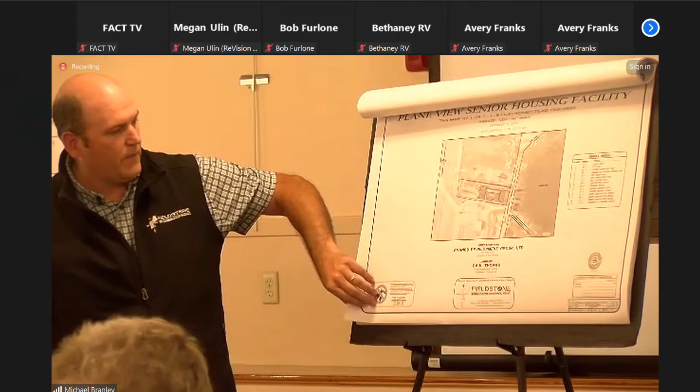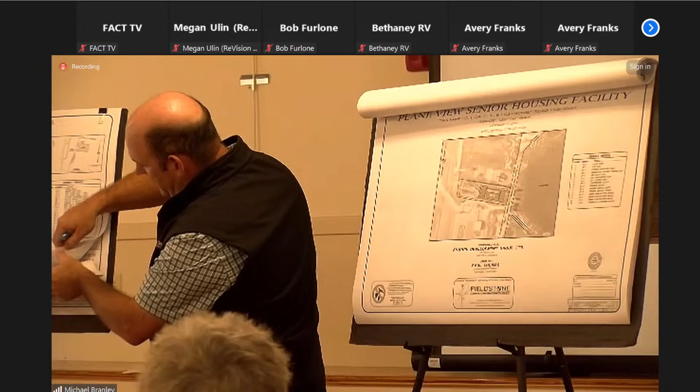With this submission, it's kind of what we had submitted before. I know there was a request for me to bring the old plans and the new plans so that we could go back and forth. With this project, we had modified the parking layout. As a condition of approval, we have to modify the parking layout in the back to accommodate no waiver in the parking lot reduction. So this was the plan that we had presented and was ultimately conditionally approved.

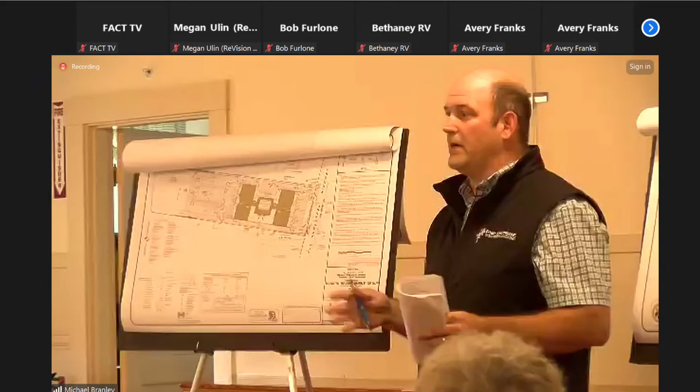This plan, if you recall, showed a future parking area back here, but we didn't finalize or formalize that because the board, unfortunately at the time, denied our waiver of the 20% reduction request. So with this layout, we needed 118 parking spaces. The current layout that we have before you depicts the 118 spaces, and it shows an improvement to the landscaping. We also addressed the drainage and utilities for the project.

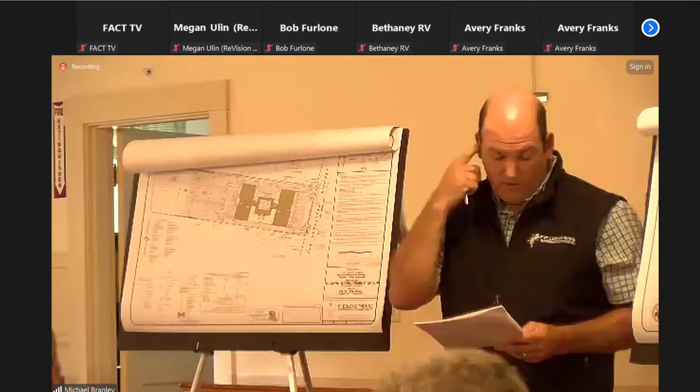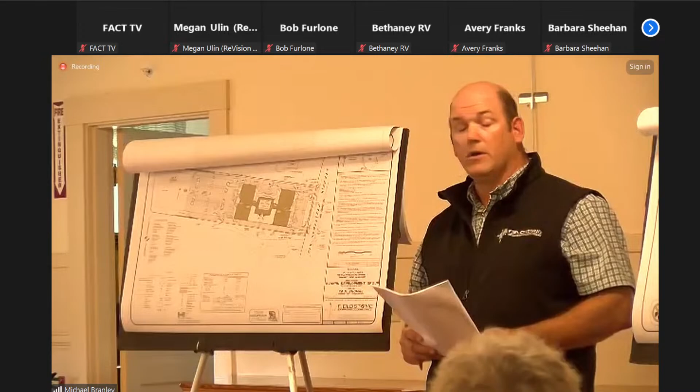We can go into as much detail as the board would like on that, but looking at the staff memo, I want to focus on the questions relative to the drainage plan, utilities plan, and landscaping plan. We took the opportunity this week to make those adjustments, and I brought 11 by 17 color plans with me. I just want to go over the very minor modifications, and I think it'll show that we have sufficiently addressed all the requirements. So, if you don't mind, Mr. Chairman, I'll hand these out to the board, and then I can walk through the changes.

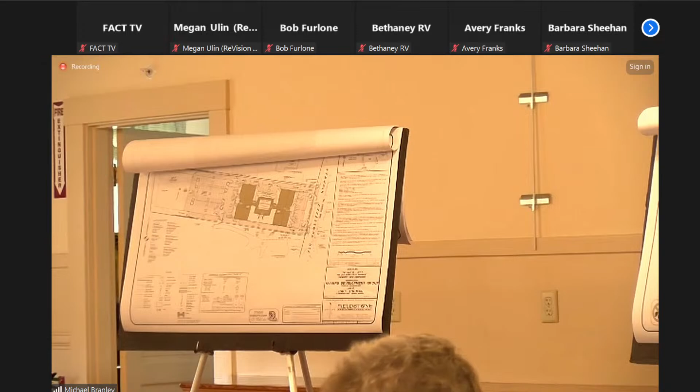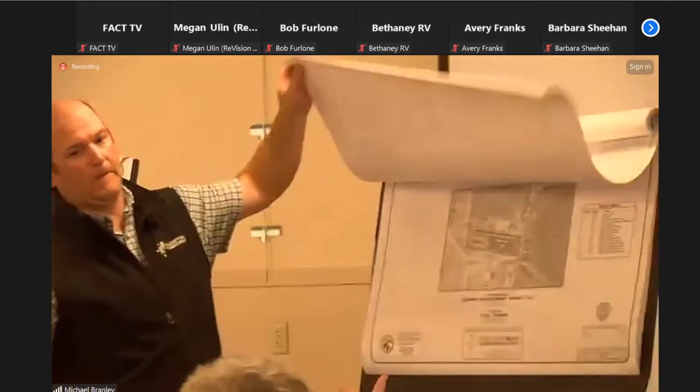There are very few revisions to the plans that are before you, and the ones I have, I'm happy to go over. I think the first place to start is just taking a look at the set, and we'll walk down through those.

The drainage plan had a comment that it was incomplete because we didn't show the ribbon around the building and the connection to the drainage system. So basically, all around the entire building we have a stone drip edge, and that has a 6-inch perforated pipe that ties into the drainage system. We've shown that stone drip edge on this revised plan in front of you.

We've shown 3 connections to the drainage trunk line that was part of the plans we submitted. There'll be a connection out in the front corner of the building tying into catch basin 1, a connection in the middle tying into catch basin 2, and another connection down here. We typically don't show perimeter drains and connections until we get into a construction plan set.

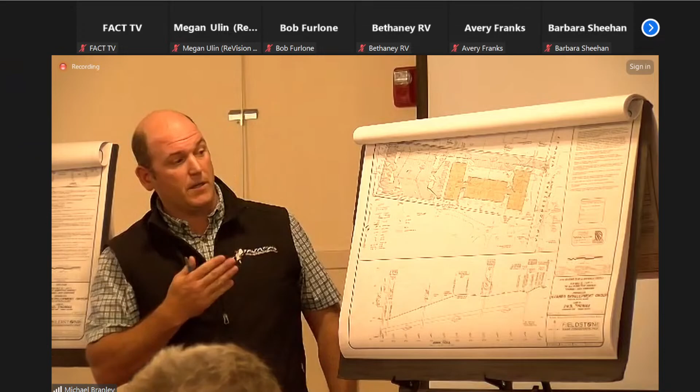But it was a valid question, a good question brought up during the plan review, so we wanted to detail that on these plan sets. We normally don't show that because foundation design can change a little bit when it goes to a structural engineer, and they might recommend an 8-inch pipe instead of 6-inch. But our calculation shows 6-inch would work. That pipe goes around the entire perimeter of the building and ties in at 3 locations. So that really addresses the drainage question on this one.

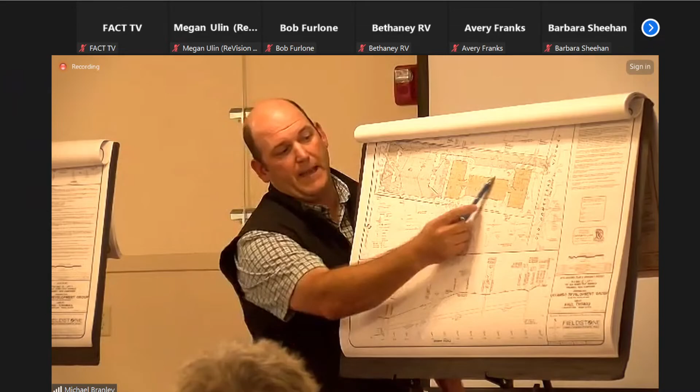The one you submit to the state will show exactly what you have now. The state ultimately approves, and the treatment components on this project are the chamber system in the back, so we're not accounting for this perimeter drain for treatment. That perimeter drain ties into the closed drainage system and ultimately goes to the StormTech chamber system. So that's really what the state will focus on, but the perimeter drain is part of their review. That's the one change for drainage.

As far as the utilities plan, there's a note in the staff memo that says the updated utility plan shall include a manhole as requested at the street intersection. That's this connection right here. That manhole actually is already in.

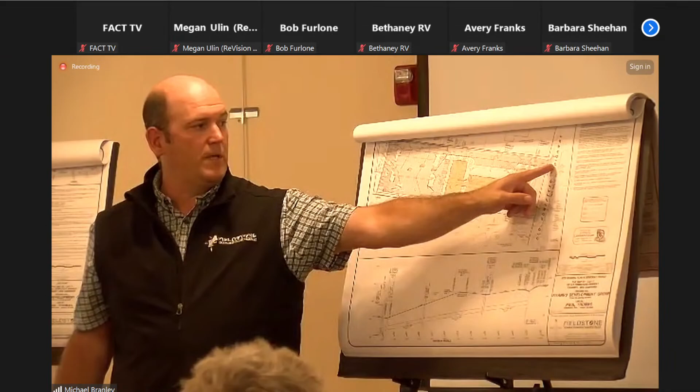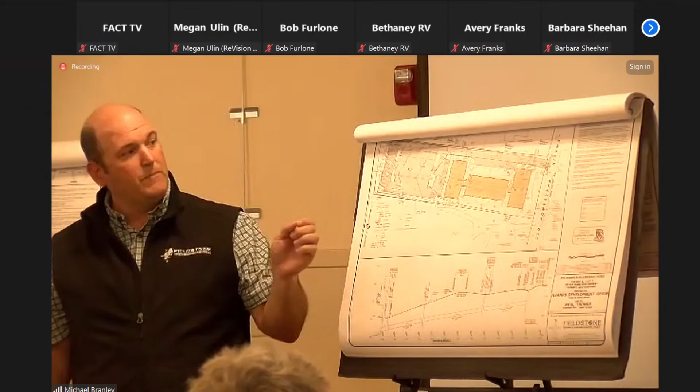When we secured approvals for the landowner, Mr. Thomas, he actually put that manhole in and the stub onto the site because DOT was coming through with paving the highway, and there's a 5-year moratorium when the state does that. So he did that to make sure the utility connection wouldn't be held up by that moratorium. That manhole is there, which is why we weren't showing the proposed manhole, but for whatever reason the symbol for the existing manhole wasn't depicted, so we added that to the plan before you.

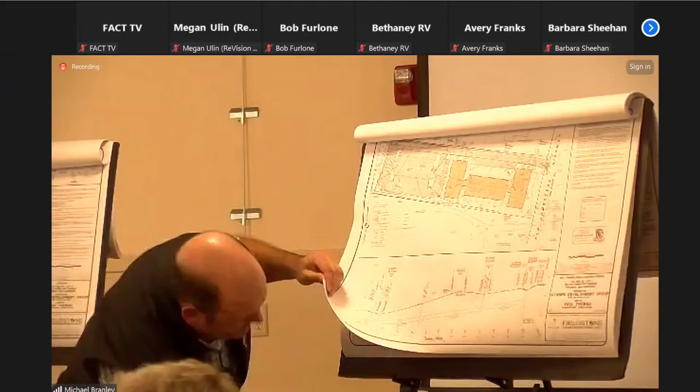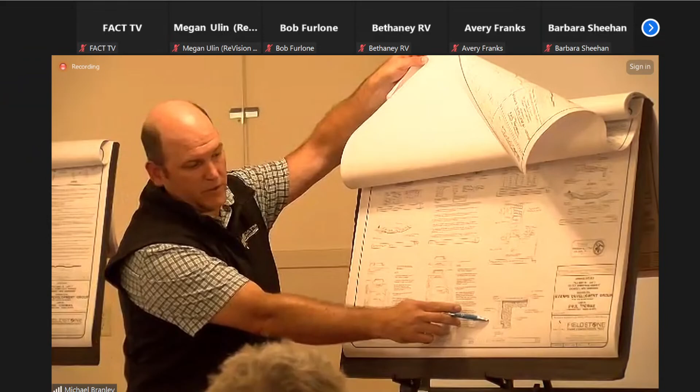So a very minor change on that one. I'll also note that with the addition of the perimeter drain, we added a detail to the detail sheet showing the stone drip edge perimeter drain material, dimensions, and the 6-inch pipe. So it's part of the construction set, not just detailed on a plan view. Sorry to be hopping around — that's why there are 4 plans, one being the detail sheet, the last one.

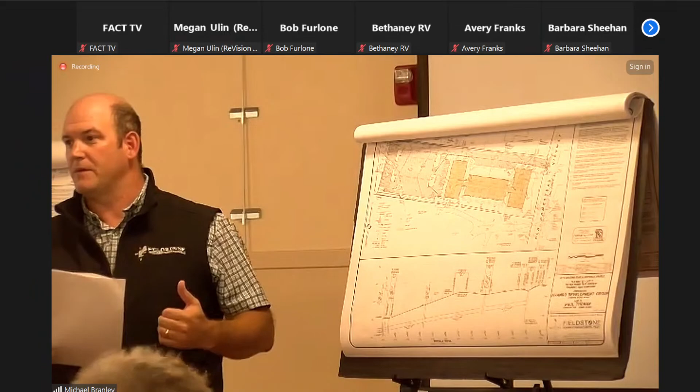The last item consists of the landscaping. I personally did the calculations for the landscaping this week, because this calculation can get very complicated for some reason. I tried to really detail and simplify this, because I think what happens is we're running a lot of calculations and sometimes we group them, making them hard to check. So what I did, and you'll see on the landscaping sheet in front of you, sheet 6, is detail the areas I'm counting in the back of the parking area for landscaping.

So when I ran the numbers, I was short by about 50 square feet. We removed one parking space, which is 152 square feet, just so you know. We've updated the site plan in front of you, which shows an updated parking calculation where 117 spaces are required, and now we have 117 instead of 118.

Taking a look at this plan, this heavy gray line shows the outline of the parking area - the area people occupy with a car pulling into a parking space, where you'd typically square off the parking. When you have these 4 internal spaces, clearly internal, that comes out to about 2,500 square feet. Then we have these corner areas, which are also internal. We've always been able to count those as internal because if we square up the parking lot, it's internal. It's not counted for a buffer, not counted for anything else. It's part of the parking.

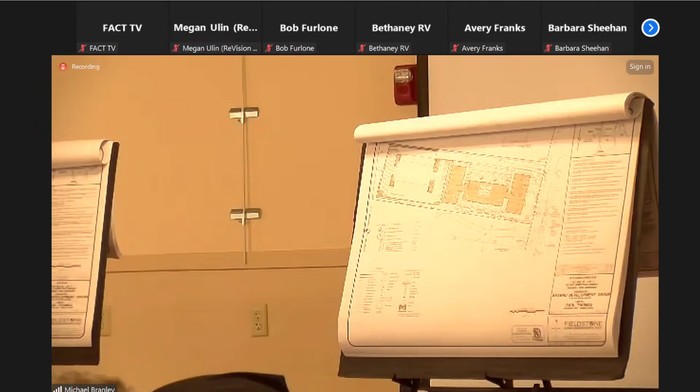This total big area here is not on the sheet, but I wanted to explain how I calculated this so we can come to some understanding. This heavy gray line has an area of 37,527 square feet. You have to take out the landscaping areas because you can't count landscaping towards a parking landscaping calculation. So that 37,527 square feet, take out the landscaping areas, all of these green hatched areas, totaling 3,433 square feet. That gives you a total impervious parking area of 34,094 square feet. And I updated that on the landscaping requirements as well.

10% of that is 3,409 square feet, and we have 3,433 square feet. So we meet that landscaping parking requirement.

This parking lot in the back has 100 spaces. Your new site plan regulations have a requirement of 10 square feet per space in a parking lot. Your new site plan requirements would require 1,000 square feet. We have 3,433 square feet. We didn't make any changes there.

There was a lot of discussion at the last meeting. There was a number thrown out, and I think it's mentioned in the staff memo, that we have to be at - there was actually a vote on this number, 3,360 square feet. So we exceed that number as well.

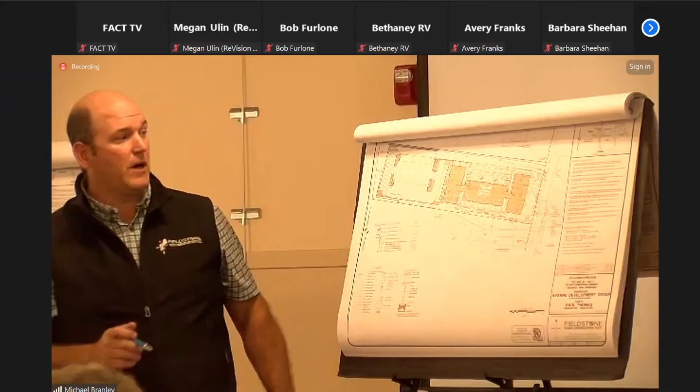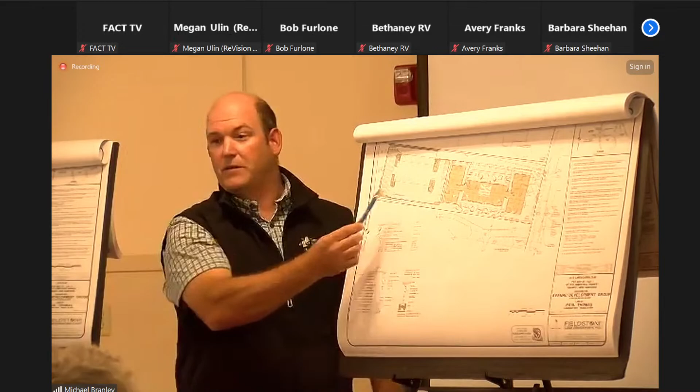So we believe we've addressed this landscaping topic. I think there was a lot of confusion in how we were doing that. This exhibit is intended to show exactly what we're doing. And interestingly enough, your new regulations essentially are exactly how we calculated it in the first place, which is you take the parking area and take 10% of that. A parking space is 162 square feet, 10% of that is 16 square feet. The regulations are 10.

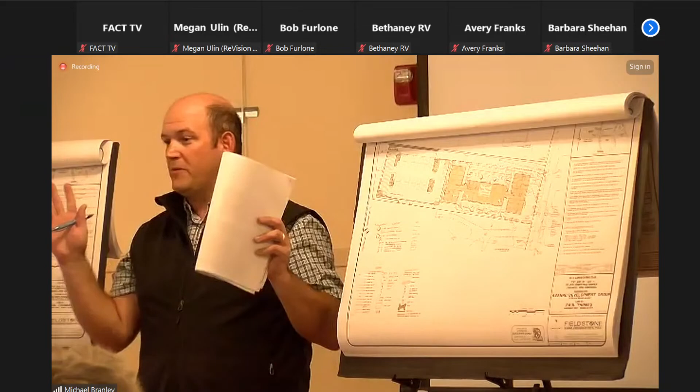So we're kicking around a lot of numbers, but I think we clearly meet what we talked about, and it appears as though we meet the intent of the current regulations. But I'm not looking to confuse anything. I just want to be very open and upfront on how we've made this calculation. I've been talking about it a lot, and I think we've addressed it.

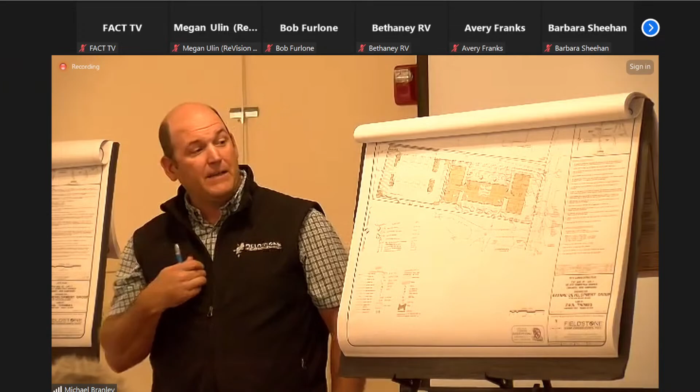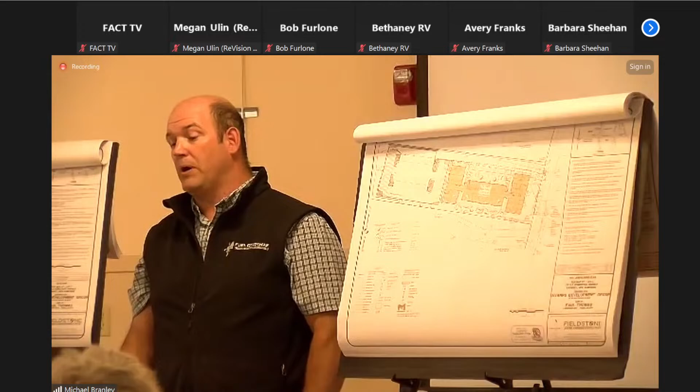I will say professionally that I am still baffled as to why we can't have a parking reduction here. I just feel like I have to share that because I know an elderly housing project is not going to require this many spaces. And I think it's unfortunate when people are talking about rainfall events, runoff, and flooding, that ethically as a professional engineer I should at least talk about how we have an opportunity to reduce impervious cover and runoff. I'm going to make a recommendation to the client that we revisit this at some point. But as it stands right now, the board has taken a vote on it. I'm just saying that personally for the record. I wish the board would reconsider that.

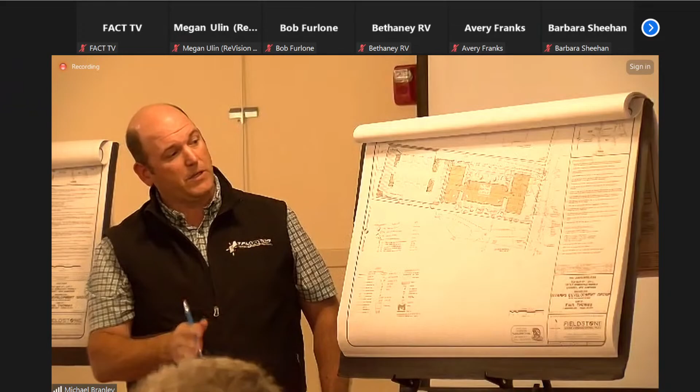So with that, Mr. Chairman, we have addressed all of the compliance items. This chamber system in the back has been redesigned to address all the impervious area. We meet all the parking standards, which I think is covered in the memo. The water and sewer connections haven't changed from when we presented the plan many months ago.

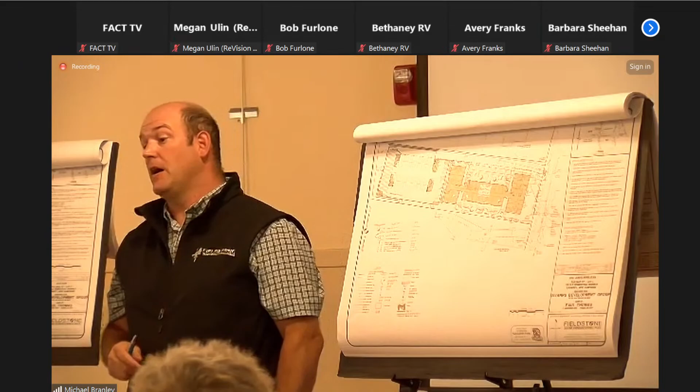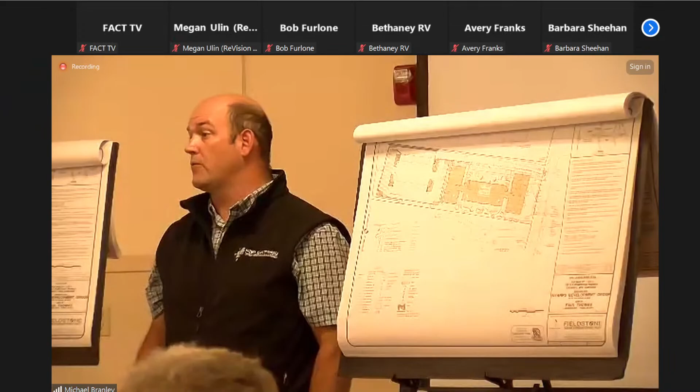It's really been a parking lot, landscaping and drainage exercise. We have made a submission to the Alteration of Terrain Bureau for this project. We have requested a waiver for a time frame, and I will share that when we've done that in the past on similar type housing projects or elderly or workforce housing, we do get a permit in a very reasonable amount of time. So we anticipate the same on this one. I look forward to moving this project forward. So with that, I'm happy to answer any questions that the board may have.

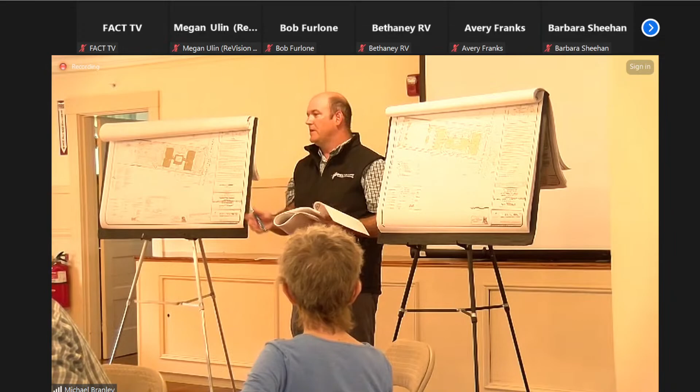Yes, and we are not opposed to revisiting the vegetation. I did see that, I'm sorry I didn't address it. We were proposing 12 pear trees. A pear tree is a nice flowering tree, so it is very aesthetically pleasing, but we certainly would be happy to look at crab apple, which is kind of the same. Mr. Franks, I don't know if you have a preference on pear or crab apple. The crab apples are nice, but the conservation commission is asking for us to consider substituting the pear trees for crab apples and serviceberries, and I can't see an issue with that.

But I wonder if you would consider yet another option, unlike the crab apple - a native species, and that's the redbud, which is... red bud. And the reason I recommend that is that it's pretty good all season and it does really well in summer, beautiful in spring, the shade of the tree is nice. It's tall, more of a lollipop shape than a vase shape, so you can get the volume of it at height, and the leaves are really pretty in the fall. It's year-round really pretty, so that's a specific recommendation, and furthermore.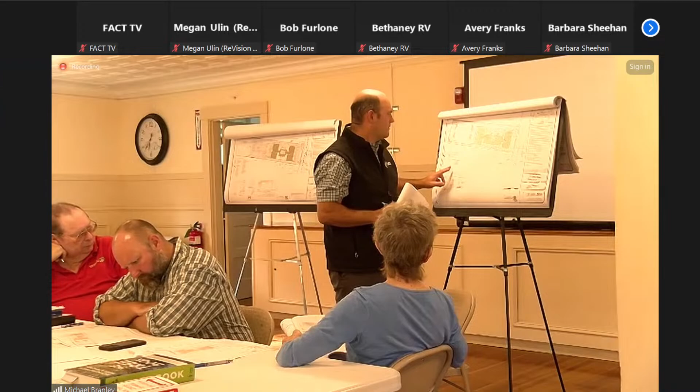And so that's how you got your second. Absolutely, I think effectively as a tree it does address that recommendation. Okay, and then just a final thought, which is that all of these, we have discretion in all these considerations.

What's your recommendation? It's just saying, you know. Yes, Jay Ward, 16 Houghton Point. I'm glad you went through the parking calculations. Let me just ask the board, if I have 10 digits on my two hands, are my thumbs 20% of my digits? Or are they 25% of my digits?

2 divided by what? The regulation says 10% of the interior of the parking lot. So if that implies that just as I might say 20% of my digits are thumbs, that the 10% of landscaping that's interior to the parking lot is part of the interior of the parking lot, just as my thumbs are part of the digits on my hands. So that means it's a minor point, but it's one of the reasons there's been some confusion about this: the assumption is that 10% of implies that it's 10% of the whole with the 10% deducted from it, 10% of 90%, in other words, or 9%.

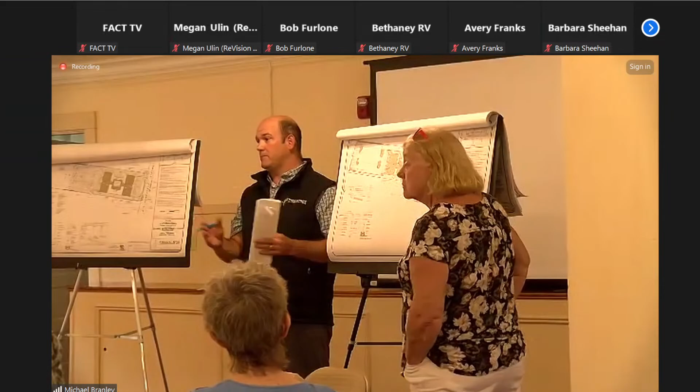We can get into that detail, talk about it. We've got to shift the tree or two around, you know, take one of these and put it here on the gable. We actually have a fair number of plantings through this side here. We have some arborvitae, and we have blue spruce. So I think we're only really talking about maybe this stretch right here.

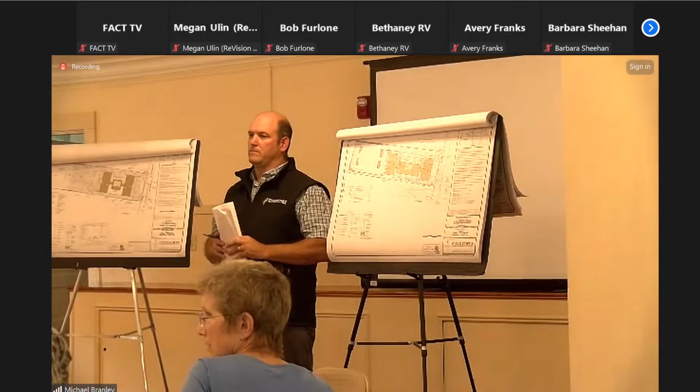I don't remember what meeting it was, but I remember when you're upstairs at one meeting asking why there was no landscaping in that third section on the south side. It just sticks out when you look at a picture like this, what it would finally look like. There was nothing in front of that part of the building from the south side. I remember speaking to that, so it's noted here in the minutes, in reference with the original.

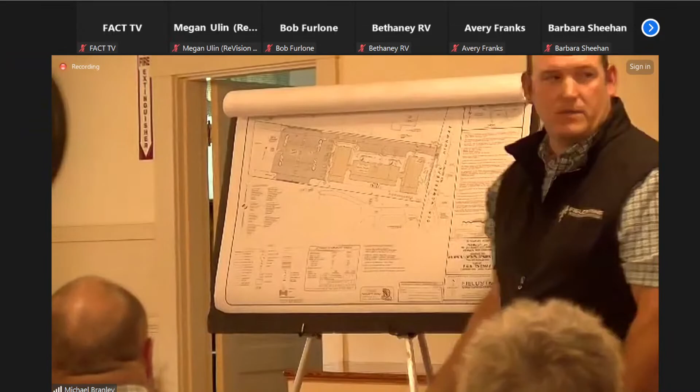This was the exhibit plan that we presented. That showed the layout at the meeting, and you can see we hadn't any landscaping along this section here. But we clearly have changed that. You can see the vast amount of landscaping that we've added.

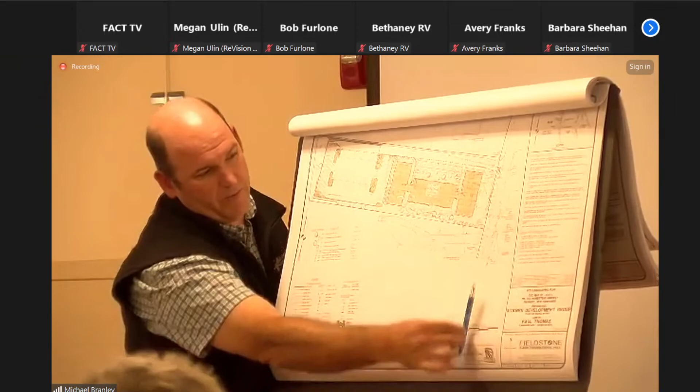We're happy to shift a tree or two in places, but I think what we need to understand is we're going to be traveling on the road through here. You're going to be looking into the site through where we try to concentrate a great deal of that landscape. And we do meet the regulations, we actually exceeded because we've added, as we suggested, some landscape.

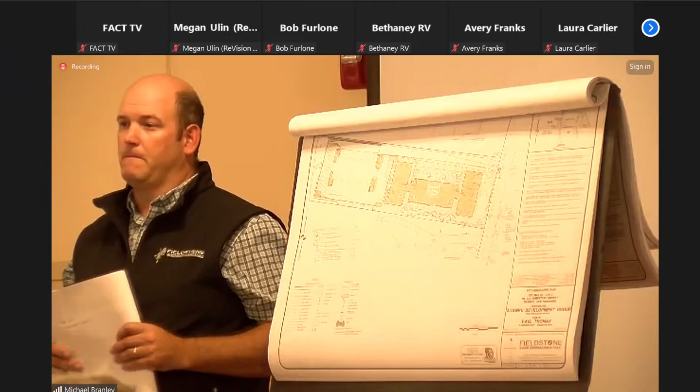Well, that's very true. We will be visible to people at the business next to aviation lane. They're not here to say anything, but I would say if I were visiting there, where they have an outdoor area and everything, you would certainly notice that if there's nothing, versus one more tree.

It's sensitive to the cost of things, but we're also highly cognizant of the impact that this very large structure is going to have in the densely populated area that is occupied. So I think it's not unreasonable for us to make sure that we can screen it and soften the impact as much as possible.

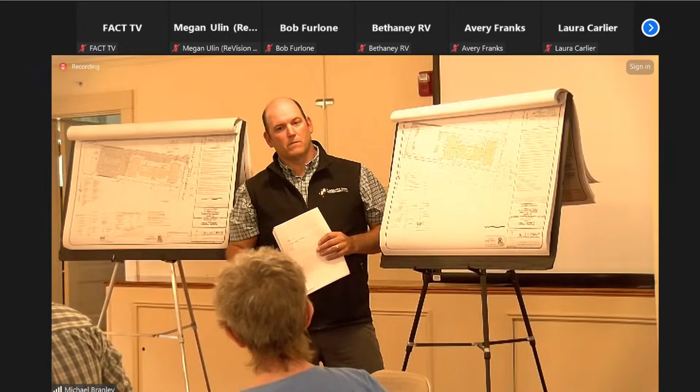It's not - we're not here looking for approval where we'll be negotiating the landscape. I think we're at a different stage. With that said, I'm not trying to be difficult. I'm just trying to make sure we stay within the boundaries of something here.

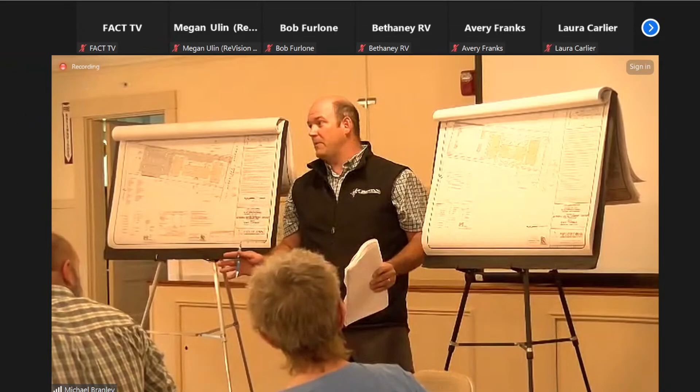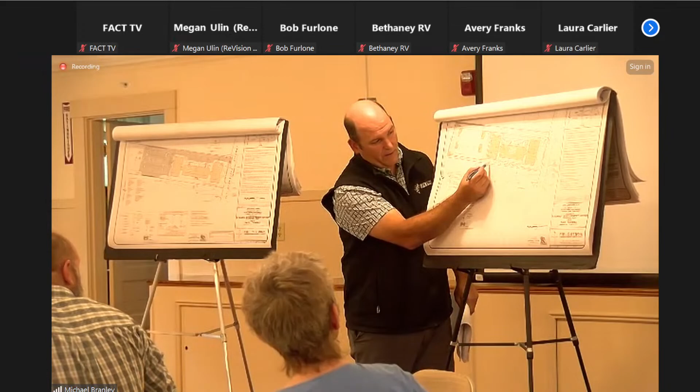We could add one more tree right here, which I think would balance the distance. Right, so, but we have to agree on this, so if we add a tree here, or somewhere in this location, right there, that balances kind of the distance between the trees along that section. Would that address the concern?

I think, and I suppose I'm not supposed to speak of it, but if I were living in that building, it would mean a lot to me to have a tree outside. That section has nothing outside of it - it's just that last section.

So we would ask that this be allowed to be an administrative thing so that we can hopefully make it through the compliance hearing. I understand it is better than it was, and you did put some in there, but why did you put one in there anyway?

Rachel, can I just say this - I would just ask that the board consider what you said, moving something like right here. Way back here is going to be back by the airport - nobody's going to see that. But up here, everybody's going to see that.

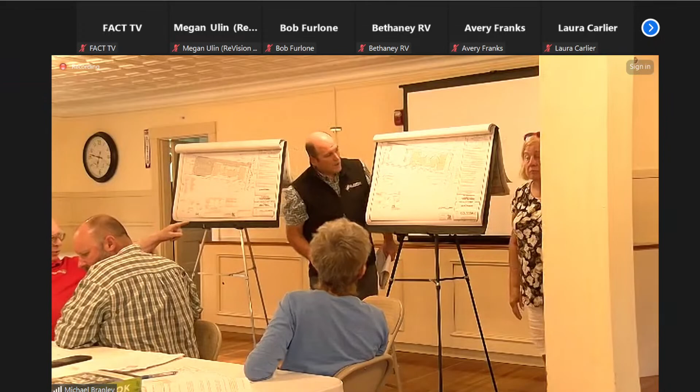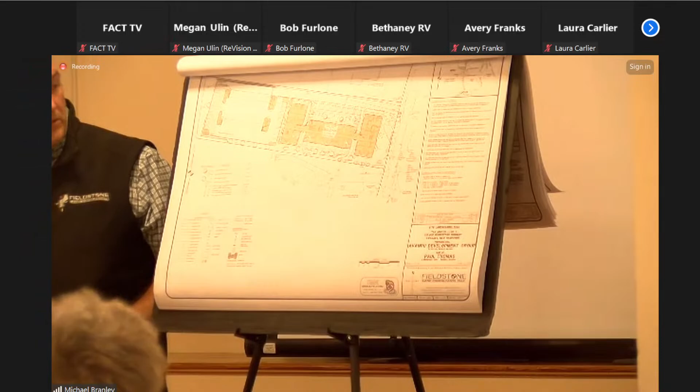Any other comments or questions from the public? Anything on your mind?

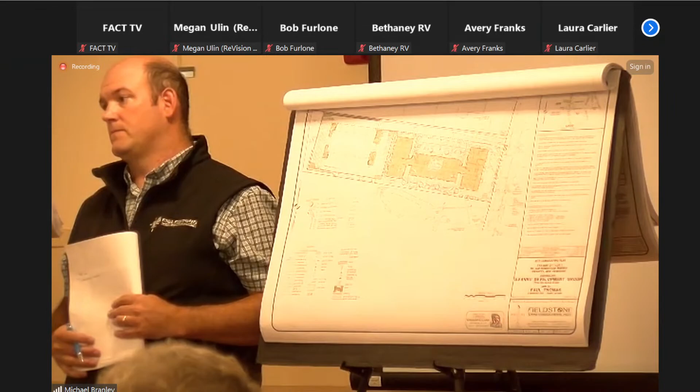Thinking about what you were asking about parking, and what it might do with the landscaping, I'm inclined to ask that we continue the public hearing until the 27th.

And have you, with what you're suggesting, what you feel as a professional we should be looking at, and showing the landscaping changes that would encourage doing that. I think we still have a lot to digest on this - that's my sense, not a consensus of the board.

So you're saying that you personally feel that we as a board should reconsider the reduction of these components - the parking spaces? It would still fall within the compliance part of this.

Or we would just continue the public hearing and look at what the suggestion and what landscape changes could be there, so we could have time with it. I think that was basically the only main thing that we had.

Well, can we talk about it, Mr. Chairman, because we're at a compliance hearing.

Feel like this is a really simple discussion, and I think I'd at least like to have it rather than just go blindly into another hearing, coming back with a plan. I'm not suggesting I don't think where you're going is a good idea, but I would like to talk about some details of that.

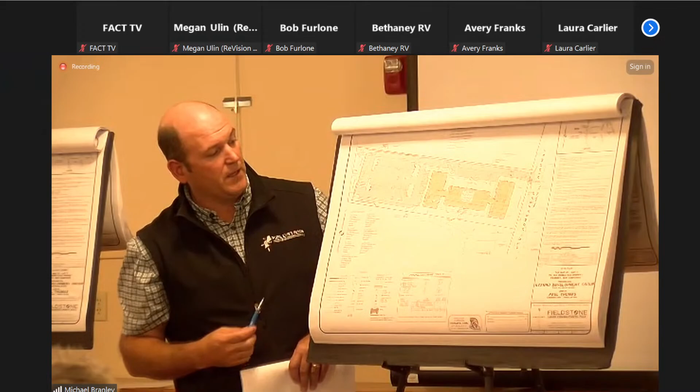Our proposal would be to move the parking this way from the back and keep the drainage out there. So you have more green space in the back of the site. You would get rid of the 14 here.

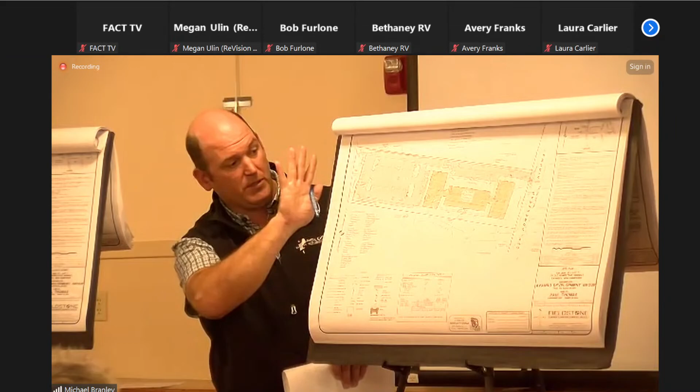And then if you take a look at the center, basically for every row of spaces is 4. So we'd be taking 2 rows of spaces there, which would be 8. So now you're right around the number that we would be at. Essentially, you take the landscape islands, you take these 14 spaces, and then you would shift that way.

And maybe we leave these 14 off the end, and we just keep shifting in, keeping the landscaping. So at that point, if you think about it, you would lose 4 spaces linearly in the center.

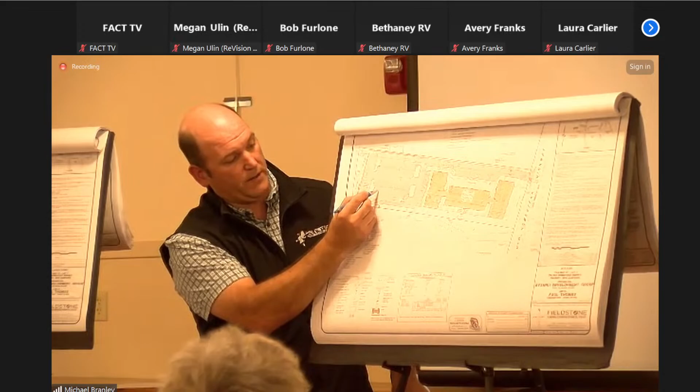And so if it's 24, let's just say for round numbers, we're talking about 24 spaces, we would lose 6 of these. 1, 2, 3, 4, 5, 6. Probably would actually be 5 because we're losing a couple of parallel spots here as well. And then this whole back will just come in.

We keep the 14 off the end because, thinking about it out loud, if we have the access aisle, it's efficient to have the parking off the back when you have the aisle already. But it would allow us to remove 5 of these parking bays, if you will, which would be 20 spaces.

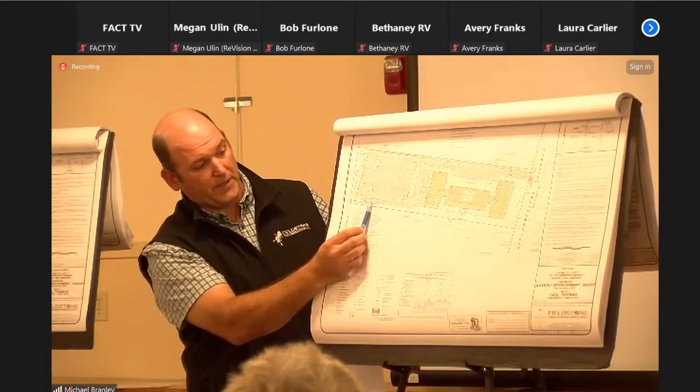And then maybe 3 parallel spaces here would be 23. Each set you're keeping the same square footage, the landscaping would reduce the land, but we wouldn't reduce the internal landscape. The percentage is actually going to go up.

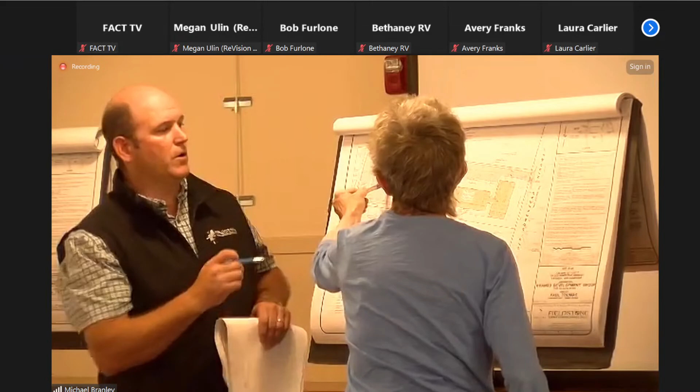Correct. Are you saying that it would remove this block? No, what I'm saying is if you can envision these landscape blocks, they would go this way, everything would go this way, 5 spaces. 5 times 4, plus the extra 3 here. Feels like it's the same part.

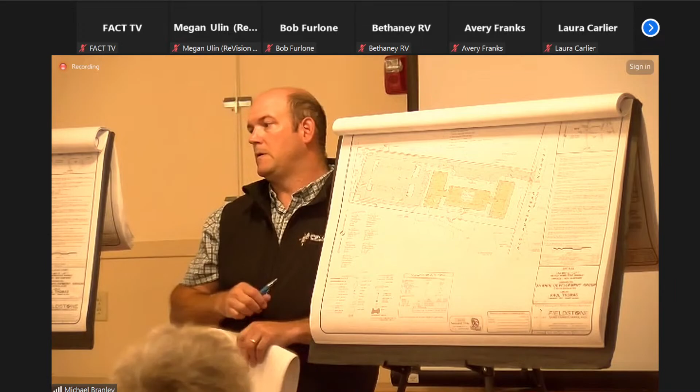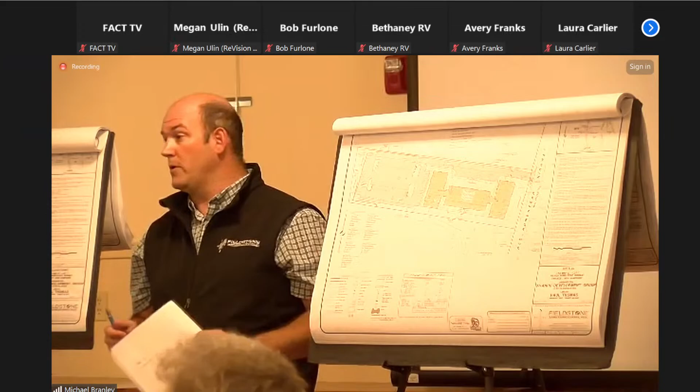But my point is here we are in a compliance hearing. The board would need to approve that waiver for us to move in that direction. So if you want, I'll formally request the waiver tonight. If you approve it, we're happy to go forward and make the plan changes. What's the feeling on that?

I've been reading about parking. I don't know if you've heard this before, okay? But when you originally came in, you had numbers from other similar projects that indicated you have first-hand experience with how many parking spaces these facilities generate.

And it was funny, 20% less than what's proposed here, right? It was more than one. We came in with, I think it was, we presented and it's been a while, but I believe it was 72 or 75 spaces?